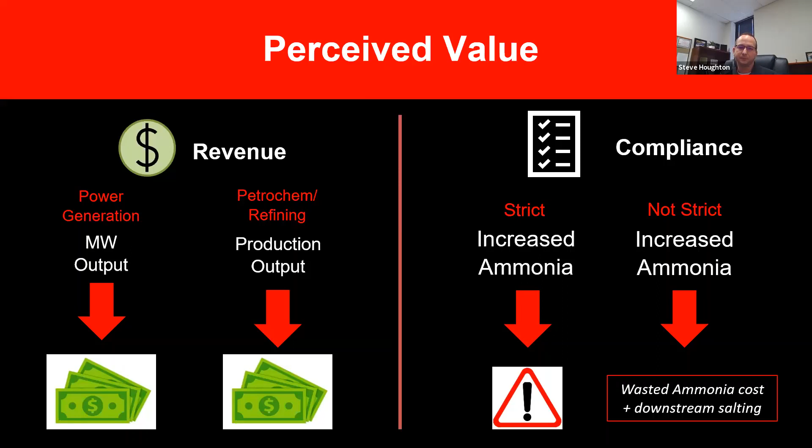Understanding what scenario your plant falls into can greatly impact the deliverable from your inspection, so you and your inspector are both working towards the same goals. I'm going to pass it to Matt to discuss a little bit more on the inspection process.

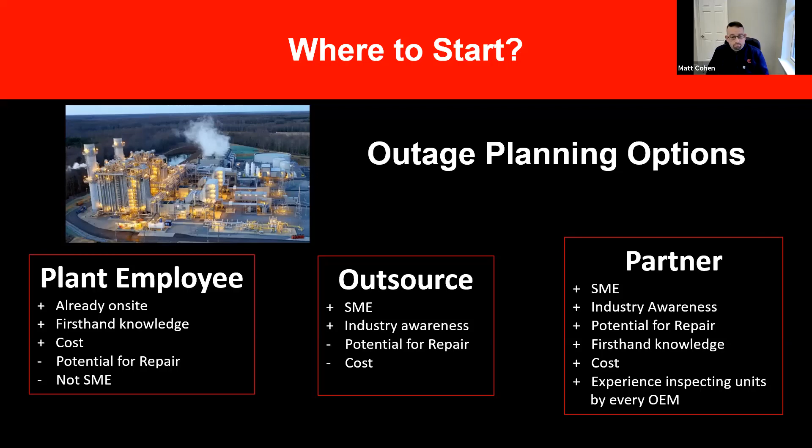So the ROI, talk about the investment. The motivation to perform any action is driven by a justified reason or a return on an investment. Groome's reason for performing inspections is to create a long-term relationship with its customers that is not just a business relationship, but a partnership. If a customer requires service work following an inspection, Groome can perform the work turnkey, from identifying an issue to designing the solution to performing the work to correct it. Groome can support the entire process from start to finish.

While an investment is normally thought about in a monetary way, our inspection process is dependent only upon a customer's investment of time, data, and collaboration. So at Groome, our investment in an inspection would consist of scheduling a time with the plant during an existing or future outage, performing the inspection, analyzing performance or run data from the plant. We generate an inspection report for the customer, and we make recommendations of corrective actions.

From the customer standpoint, the investment required would be time to meet with the person performing the inspection, sharing issues or problems that they may have been having, also sharing goals and the future outlook of the plant, sharing the performance data, taking the time to review the inspection report, taking the time to discuss the findings or recommendations that came to light from the report, and taking the time to consider recommendations with their internal team. And as I mentioned before, we do not charge for our inspection process.

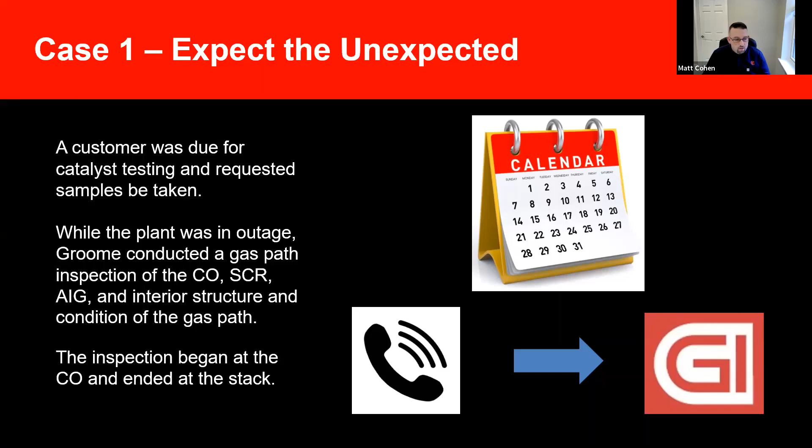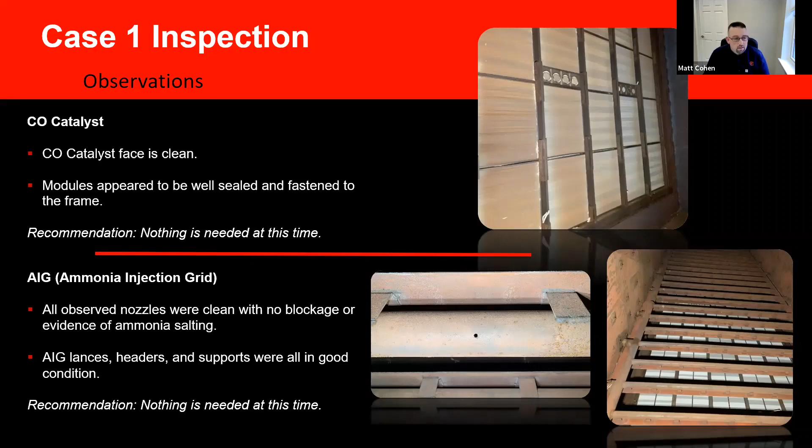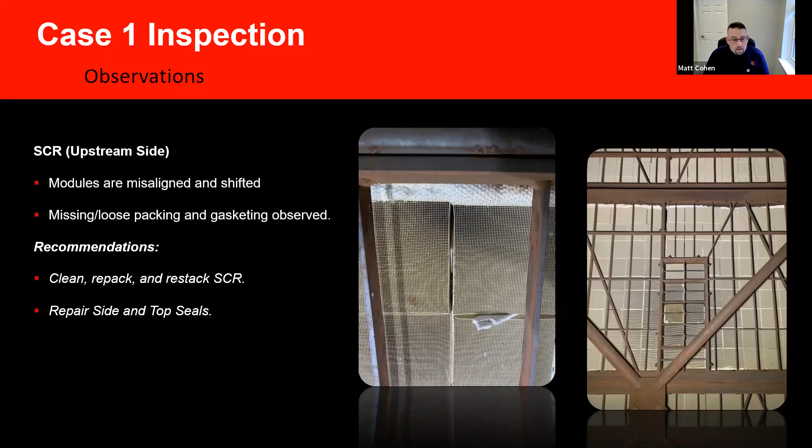When we moved on to the SCR, this is looking at the upstream side of the SCR, observed modules that were misaligned and shifted, some side to side, back to front. They were missing packing and gasketing. The recommendations that we made were to clean, repack, and restack the SCR bricks within the module, and also repair some side and top seals, which you'll see in the next slide.

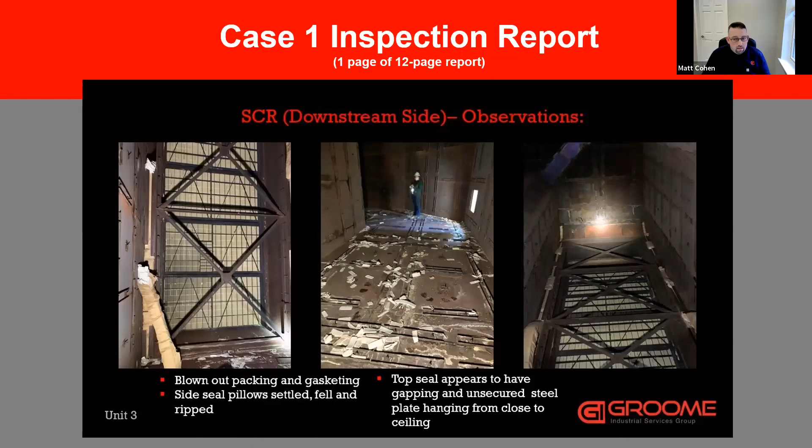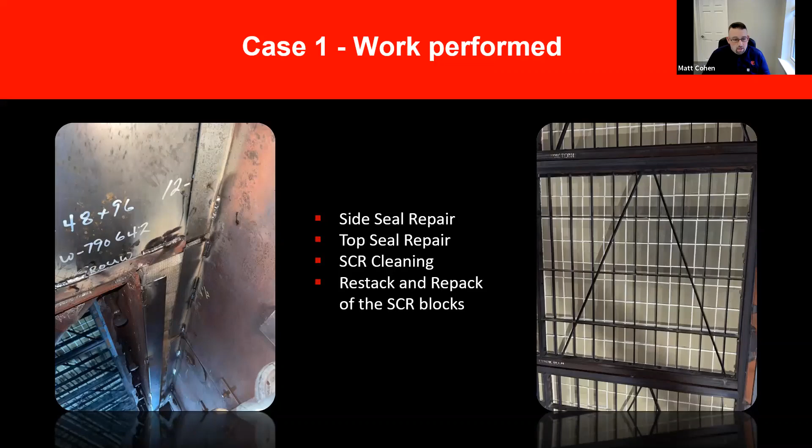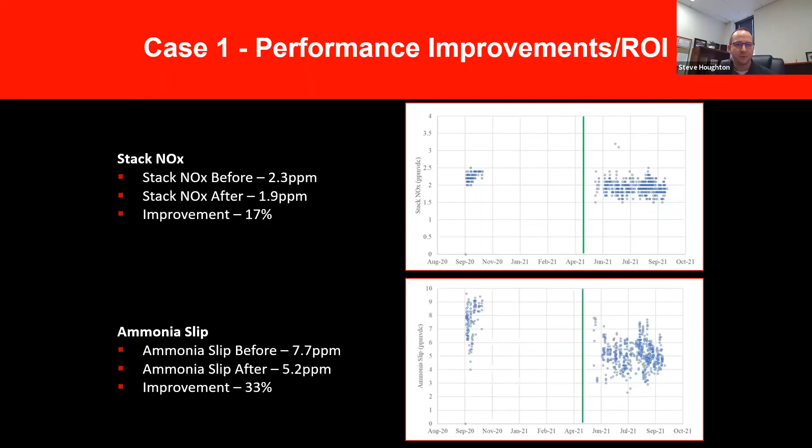I'm going to hand it back off to Matt to introduce case 2. Thanks, Steve. So case 2, emergency compliance. This plant had elevated CO emissions at the stack, and they took an emergency outage. They reached out to us. We rapidly responded to the need. We got in there, we performed a visual inspection, and we pulled a CO sample button for testing.

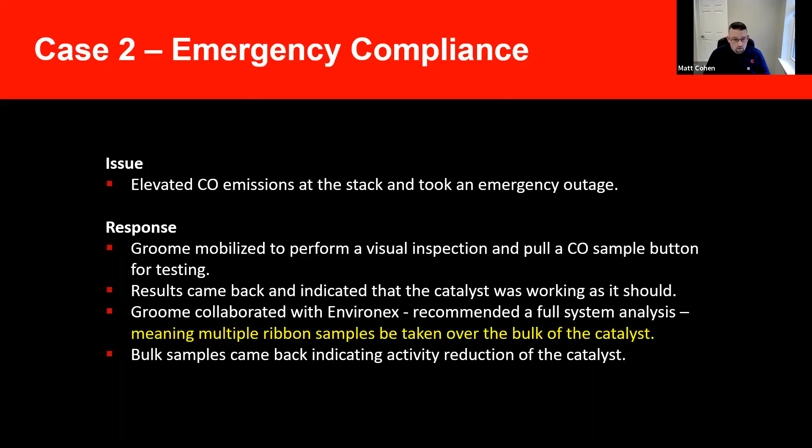So the results came back and indicated the catalyst was working as it should, which conflicted with the information the plant was getting from their system. So we collaborated with Environex, and we recommended a full system analysis. Instead of just depending upon the results from that single sample, we wanted to understand what's going on across the entire bulk of the catalyst, not just a snapshot. So the bulk samples came back indicating the activity was reduced in the catalyst.

So the solution was, we performed a wash study. The results of the wash study showed that an acid wash would bring the catalyst back to a functioning level. So referencing the above graph, that green line going across is the compliance level that the catalyst should be offering. The original button that was first pulled is that top solid orange line, which shows that it was performing as it should. We knew that wasn't a good indication of the entire bulk.

So when we pulled the bulk sample, you can see the bottom solid green line, it was just a little bit above 60% conversion. And based on the wash study, you can see the dotted green line at the top was the acid, and it was the best choice. So we performed the acid wash of the entire catalyst bank, removed all the modules, performed that outside the unit, and reinstalled them, and the plant is back in compliance.

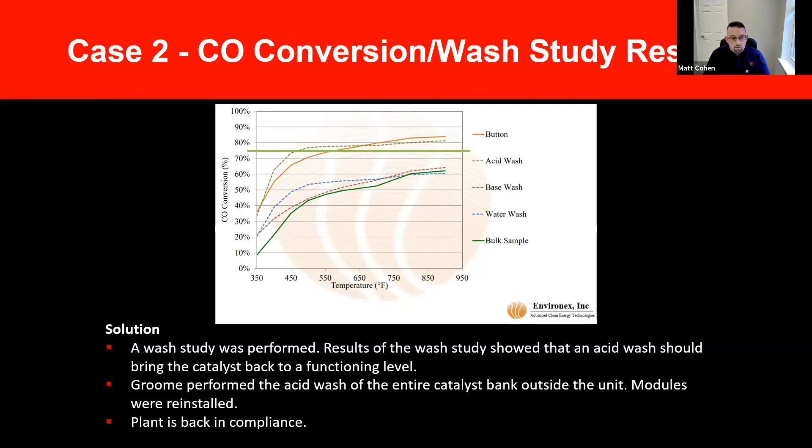Fantastic. This is a great case that illustrates that all tests are not created equal, Matt. The plant was able to make an educated rush judgment based on the findings that they got from the testing and wash study, and avoided major CapEx spend. Everyone knows that steel and precious metals haven't been cheaper. They're on the rise lately. With that said, the plant saved well over $250,000 versus just replacing the catalyst and not looking at what their options are.

Another level of this is just looking at other tests. A simple test, as opposed to a wash study, would have shown just a few variables: how much life the catalyst had left, platinum load, those sorts of things. The full wash study showed much more, including expected results from different levels of washing, in addition to some of the test result outcomes that Matt went over.

So the results always vary in a wash study, something always worth considering. You might not always need to get the Cadillac of washes. It's worth completing the wash study to understand how your catalyst will react under those expected running conditions. Now on to the exciting project that's still underway. Matt's going to introduce it.

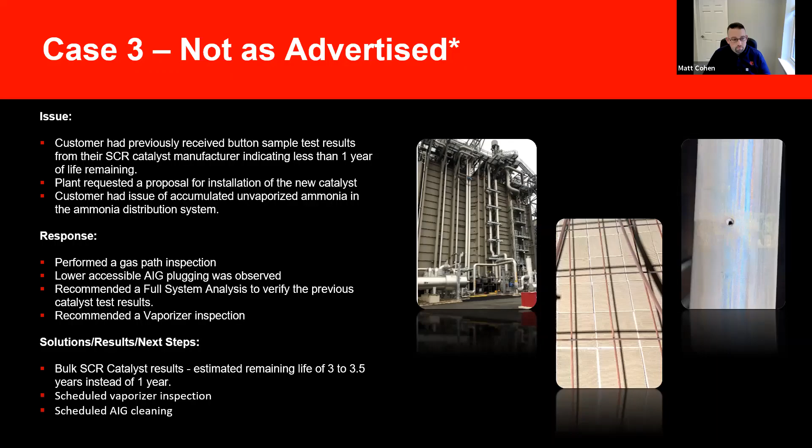That's a good point there, Matt. Short term, as you're kind of leading up to, this plant was able to delay CapEx spend in the 7 figures by up to 3 years. With multiple units, and CapEx expectation or spend of $500,000 per unit for replacement, it's well over $1 million in savings that this plant saved and delayed in CapEx, and they can use that budget elsewhere and plan way more in advance this time around.

So huge win, but the savings didn't stop on the catalyst spend itself. The system balance also enabled the plant to utilize the ammonia much more efficiently. This can save a plant $40,000 annually on the ammonia supply alone. Now, the third piece to consider is lower ammonia usage also extends the life of the catalyst.

Since this is an ongoing process, it remains to be seen exactly how much more life we can realize from the existing SCR for this plant, but we'll continue to work with them to do just that and get them more life out of their existing asset. At the end of the day, the plant's been empowered to use what they have and work at a high level without spending 7 figures. And that's a huge win and a classic case of working smart.

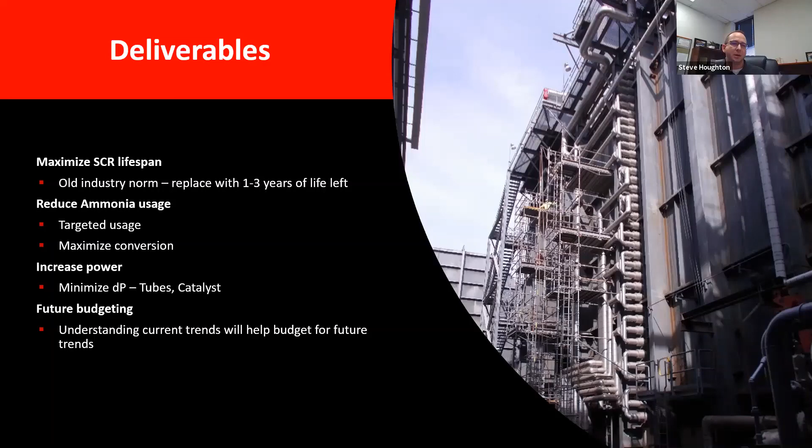I want to end on a high note, a very important note. You don't need a long outage to complete a proper inspection. 1 to 2 days down during your short outage, maybe in the fall, gives you time to properly plan for your big outage, your major, or your big turnaround. Next year, next outage season. So take advantage of it and work with your partners proactively.

That sums our presentation up for today. I'm going to open it up to questions and answers. Looks like we've got a few of them. Matt, you touched on this a little bit. I don't know if you can see the question or not, but I'll let you answer it. What's the cost for a HRSG inspection with Groome specifically?

Yeah, so we actually do not charge for the inspection. We do perform repair work ourselves, turnkey. So this is just an investment on our part to show how invested we are in our relationship with our customers. Perfect. Yeah, this seems to go a long way. It's that unbiased opinion, which is always good. So, a second question here. What areas do you cover for the inspection service?